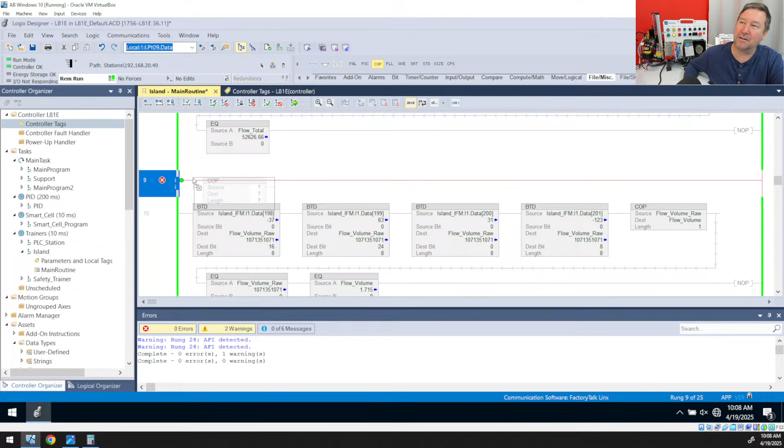Actually, you know, and this is a bad habit of mine. And it wouldn't matter for this, but I'm going to bring this down. I'm going to right click and I'm going to go to instruction help because I should not do this. And just old school, I do.

Notice it says copy file, and then we have synchronous copy file. These are the same thing, except when you use the CPS instruction, nothing can write to the data. Whoops, I don't know why that's popping up. Nothing can write to the data while it's doing the copy instruction.

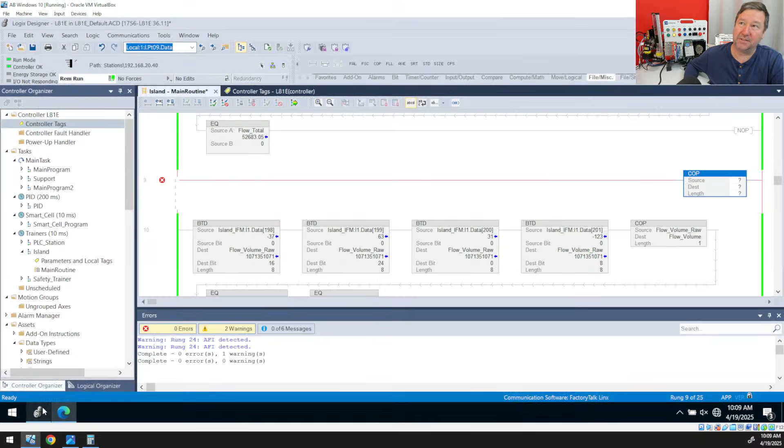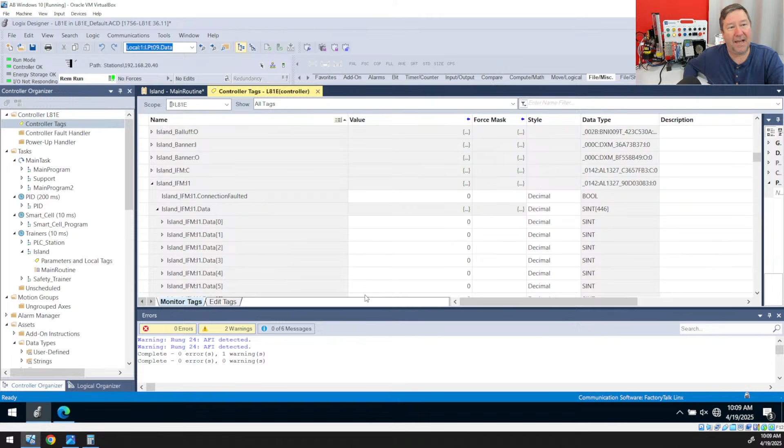So let's go back over to Studio and talk about why that could be important. Because really, you're doing communications if you're doing this, so I need to try to do it the right way here. This is an IO link module. And if we go up, it's actually, how many? 446. So we have an RPI on our data, on our IO modules over here. I'm not going to go in and find it, but every so often, this is going to update this data. And it doesn't matter where it's at. So let's just go back down to that 198.

I'm just thinking about Margie right now, who was in my last class. She's probably sitting there: oh, look at Tim, he's scrolling. I get on people in class all the time. Quit your scrolling. There's better ways.

But okay, here's where we are. So if we were coming down through here and that RPI hit right while it's doing this copy of 199 and 200, it'll stop doing the copy and it's going to update this data. And that means that the first two numbers are going to be your old data and your second two are going to be your new data. And honestly, I don't know there's ever a time that you shouldn't just use a CPS instruction. Now, a very bad habit of mine is I almost always use a copy because the CPS didn't used to exist. Does anybody know of a reason you would ever not want to use a CPS instruction? I can't think of it, but all right.

So now we know we need to get this data right here. This 198 is the beginning of the data, and we want to get it into some singular destination. Now I'm just going to call this my copy combine. And I'm not going to create this yet because that's the important part to understand. Now I'm going to right click the CPS instruction, go back to instruction help, and go down to this length. The length is the thing we have to understand. The length says the number of destination elements to copy. The key word being destination.

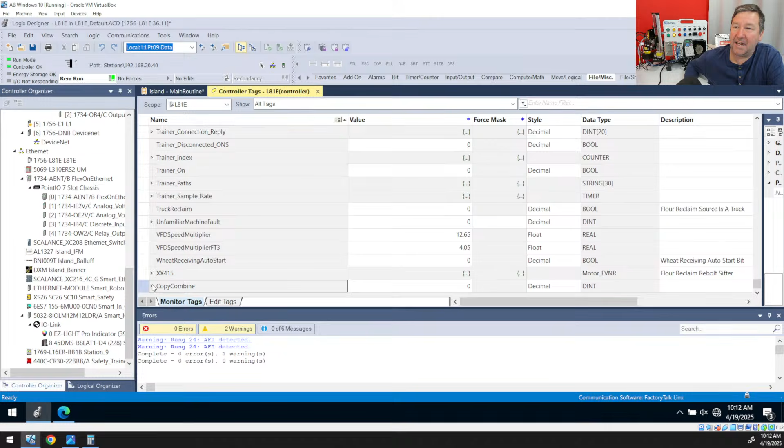Now, what they don't 100% nail down here is this really is binarily how many ones and zeros do you want me to copy? So we know our data is in 198, 199, 200, 201, and we know each one of these is 8 bits. That means that we need a 32-bit number. A 32-bit number is the default data type of the ControlLogix. So if I right-click in New, Copy Combine, notice it defaults to a DINT. So I'm going to hit Create on that. Then I'm going to right-click Copy Combine and monitor it, and hit the arrow by it. And we see in there, we have 32 bits. So we've made one number 32 bits long. So I'm going to put a length of 1, and then we are going to finalize that.

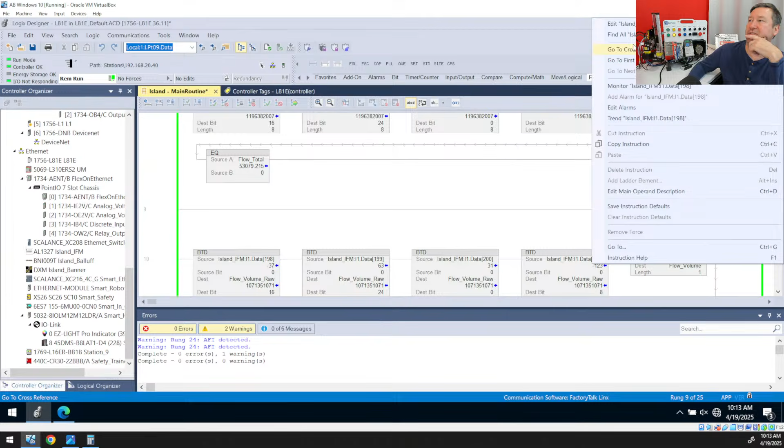Okay, so now we have a destination of copy combine. In fact, I should make this where we could, yeah, this is a good exercise. Should I do this now? No, we're not going to. We're just going to go look at copy combine. And mainly we see we have ones and zeros, and definitely 0 through 7, which would be 198. And then 199, which is 8 through 15, definitely has stuff. And then 16 through 23 definitely has stuff. And then on to 31. Okay, so that gets us to here.

Now here's where it starts to get tricky. Originally this was a floating point number. We're actually going to add a second copy to this. And I've really got to get a better habit. We need the CPS instruction. And I'm going to take that copy combine, and I'm going to make that copy combine real. And I'm going to also make it a length of 1.

Now I want to be able to see this data right here just so you can see what's going on. So next I'm going to go to the Compare tab and bring down an EQ instruction. Also, if you were before version 36, this was an EQU instruction. And I want to put both of those so we can see both of them. So I have copy combine. I'm going to say that it's equal to 0.

And then I'm going to take my copy combine real and that it's equal to 0. And then, oops, I forgot to create copy combine real. So we're going to right click new, and I want this to be a real number. Okay, now you notice we have a red X here.

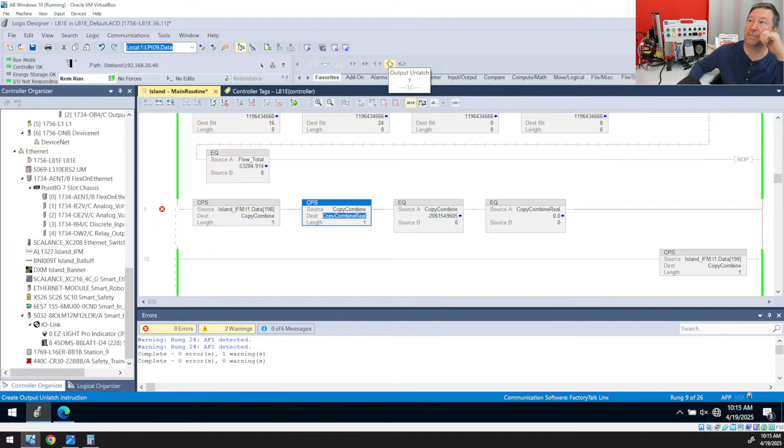So here's something you can do, and I can drag any old instruction down. When I say, and it's funny, I'll tell people in class, just drag any instruction down, and they'll be like, well, which one is that? I'm like, anything. We drag anything down, we highlight the shape, and we type NOP. That's a no operation. That's going to give us green. It's not going to actually do anything. So we'll go ahead and finalize that.

And we are going to get some incredibly insane number. This is -7 to the -36. Now, I don't really get into a lot of math on this channel, but pretty much this means we need to shift this decimal and negative, so the number gets smaller, this direction 36 times. So we have an incredibly small number here. And we know, if we can get to the right place, we know our initial number was 102. We're nowhere close to 102.

Now, most of you got to around here, and it's funny, even in my class, you'll get to about here. And most of them are like, well, go ahead and just use that swap byte and start throwing stuff at it. And so in class, they'll be like, yeah, we need a swap byte instruction. I'm like, oh, what's a swap byte instruction do? It's like, it'll fix your number. I'm like, what do you mean fix your number? Has it got a flat tire? I mean, what is it fixing about the number?

And so it's funny, most of us have heard of the swap byte. We know the swap byte, but we don't know what's going on. So I'm not going to give the full lesson that we do in class because we don't have enough time. But what I always say is most of your data coming across the network is in bytes. It is 8 bits. So even when we go back to our original number, right click here, we monitor it. These are short integers or 8 bits. This really is how the data goes.

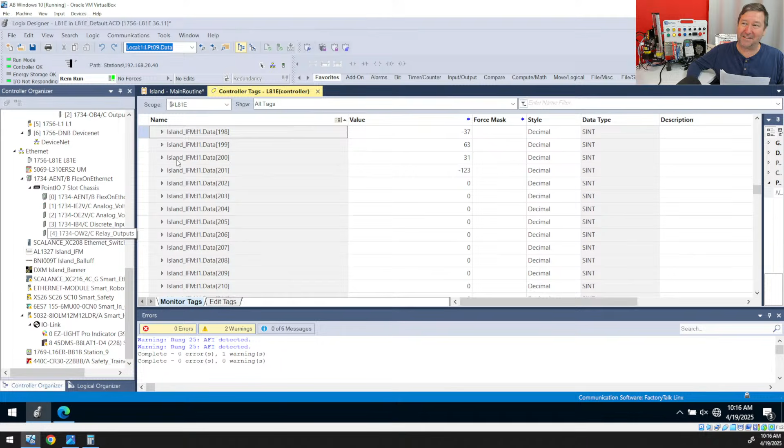Now, I know this is not a perfect analogy, but I always say, some people can pick up a lot of paper. Some people can only pick up a little bit of paper. Now, notice we have A, we have B, we have C, and we have D. So this represents 198, 199, 200, and 201 of our data. Now, here's the trick to this: rarely somebody will pick up all 4 of them and set them so they're in the right order. Now, a lot of things divvy things out one at a time. So there is 198, 199, 200, 201. And when I pick them back up, my data is now reversed.

Now, some systems, they can pick up a little more. No, I know it's paper. It's just an analogy I use. Some of them are going to do 16-bit. They're going to pick up 198 and 199. They're going to set them over here. Then 200 and 201, they're going to set them over here. And that's going to get us to CD AB. So our data is definitely garbage.

And finally, there's one other one. And what I always just say is, some people, when they're picking it up, they pick up 2 of them, but then when they place them down, they place them this way. And then they pick up the next 2. They place them down, they place them this way. And whoops, sorry, I did a little bit off. Let me do that again because, yeah, that was terrible. So instead of being A, B, C, D, they swap them. It's a lot easier when I have a lot of people in there because we actually hand these papers around and we talk about it.

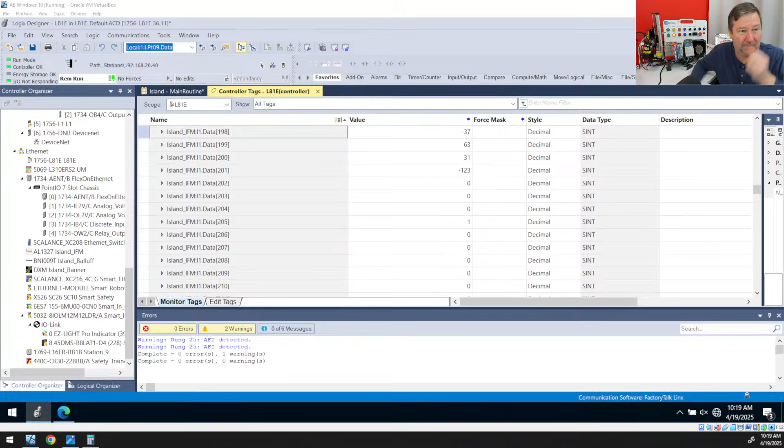But when they set them down, they end up with BA, and then CD. All right. So instead of us just arbitrarily throwing stuff, I want us to understand how is this swap byte doing? What is it actually doing? So we're going to go in here back to our routine, and in fact, we'll just add another new rung because in the end, we'll tidy all this up.

And we are going to go to the Move Logical tab, and we're going to bring down an SWPB swap byte instruction. We're not even going to worry about any of these tags that we already found. I'm going to make a tag called swap source. And I'm going to make a tag called swap destination. And then I do want these to be double integers. So we're going to create this one as a double integer. We're going to create this one as a double integer.

And then we have an order mode, and this is what it's all about. Now, let's talk a little bit about the order mode with 16-bit numbers. Let's right click and go to instruction help, because the order mode with 16-bit numbers kind of makes it a little mysterious about the swap byte. But if we go down to this order mode, notice if it's a 16-bit or an integer, all the options do the exact same thing. They're going to take the first 8 bits and put them in the second 8 bits and the second 8 bits and put them at the first 8 bits.

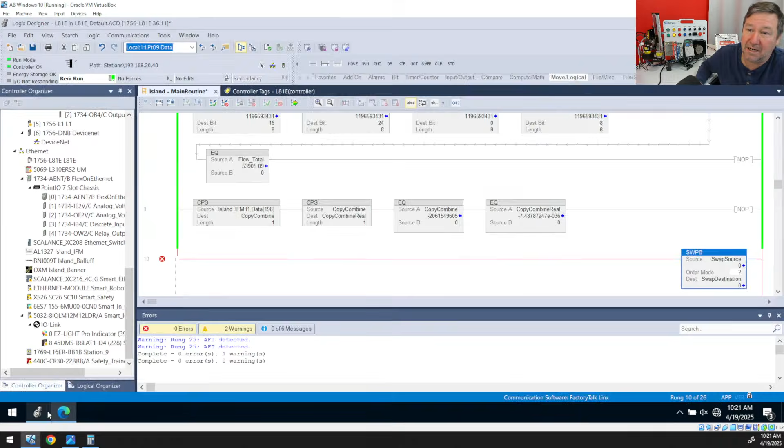But we have all 3 of these options. So people, when they're running this as an integer and they're changing these, it kind of confuses them because they're like, well, it seems to do the same thing. Well, you're 100% right. It does the same thing. But since we have a double integer, that means that they actually do different things. And so for the first one, I'm going to make the order mode a reverse. And we're going to finalize that.

Okay, now what we need to do is we need to put a value in here where we can actually see things change. Now, with a decimal number, this is very difficult because the difference between 32,767 and 32,768 is a significant change binarily. But if we go here and we go to edit swap source properties, at the bottom we can change our style. And this just changes the view that we're seeing here. And I'm going to change this to a hex view.

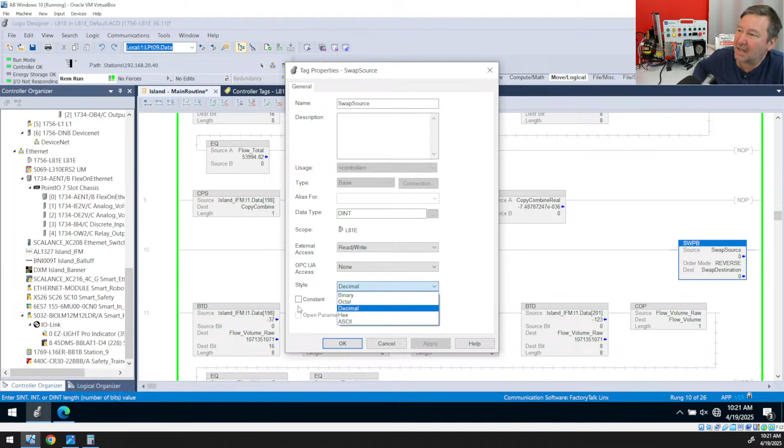Okay, really quick note for all my instructors out there: nowhere in this sentence do I see it say that you need to do a hexadecimal lesson before we do all this. In fact, please just leave that hexadecimal till near the end of the year. That way people quit messaging me saying they're going to drop their class because they can't understand numbering systems. It's really not that important for programming until way later, like right now where we're doing some intense communications.

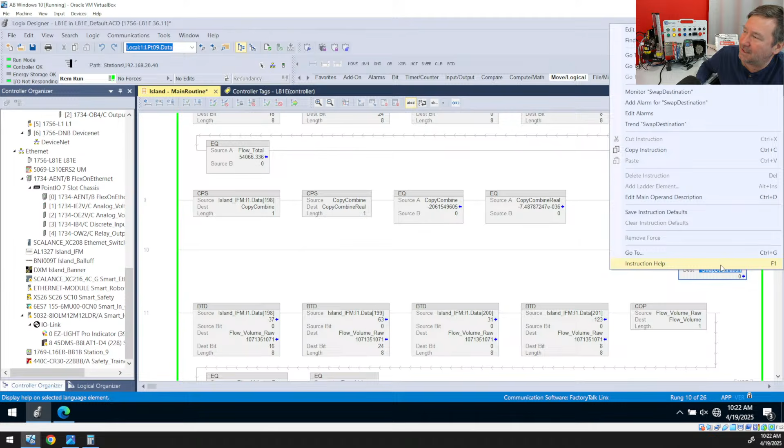But okay, we made this one a hex. And that kind of gets us where it's into a shorter bit. And then we're going to do the same thing on the swap destination here. We're going to change its style to a hex. And then in this one's source, I'm going to make this DDCCBBAA. And we have a reverse order mode. Well, that takes these first 2 letters and puts them there, takes these second 2 letters and puts them there, takes your third, puts them there, and your fourth and puts them there. Or it reverses them on a byte level.

All right, now let's do a rung edit there. And instead of a reverse, we're going to do the word. Now, a word is 16 bits, which in this case is 4 of these letters. And so now we're going to have AABB. Well, the second part of it now is AABB. And then we got DDCC. Well, that's going to kick over here to DDCC. So we've got to figure this piece right here out when we're working through this.

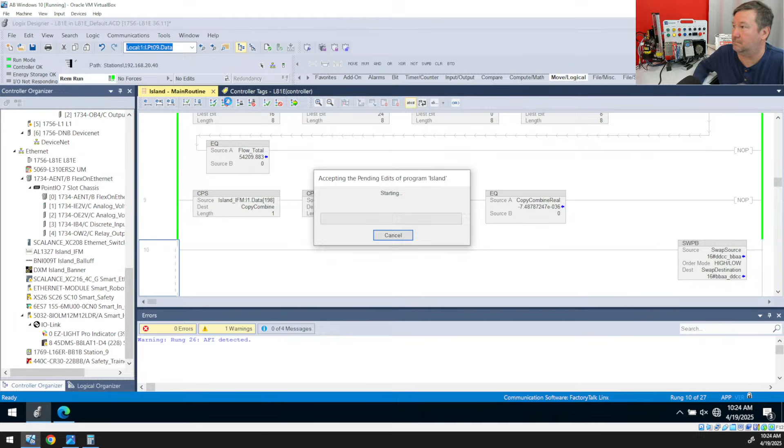But there's just one more. Let's go ahead and do the last one here. And so this is a high-low. And so this keeps us on our 16-bit numbers. We're going to be, instead of AABB, we're going to be BBAA. And instead of CCDD, we're going to be DDCC. So those 3 swaps right there will probably get you to anything you need.

But okay, now let's talk about how we figure this out. And yes, Tony Leroy and a few of you others, why that last step was such a stumbling block. All right, we're going to go ahead and start a rung on it now. Actually, no, I'll leave this one just in case somebody comes up with a question. I'm going to leave that one. I'm going to add another new rung.

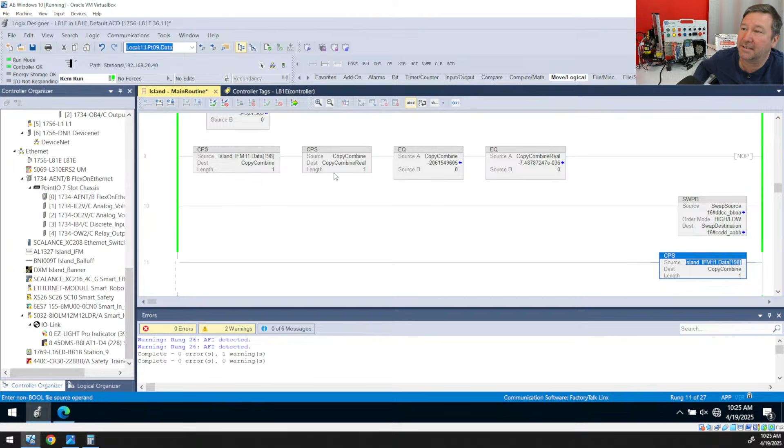And we're going to take, actually, arguably we already have it right here. We have copy combine. No, let's do it all again. Yeah. So no, one thing, we do need this again. We're going to do this again. We're going to do a synchronous. Actually, we do already have it. Yeah, there's no need. We can modify this one now. So I'm going to modify that first one we did. Really, we had a copy combine, and then we were copying to a real. All right, I'm going to delete out that second one for now. It'll be right back in a second.

So we've combined those, and now we've got to figure out, okay, well, which one of these do we actually need here? And so what I'm going to do is bring down that swap byte instruction. And then actually I'm going to bring a branch down around it. And then we're going to right click that bottom left corner of the branch, and we're going to add a branch level. And now we're just going to copy that. We're going to paste it there. We're going to paste it there. We're going to do all three of them. That way we can compare and contrast and figure out what's going on here.

So our source in all of them is going to be this copy combine. And then we're going to hit our order mode. So our order mode on the first one is reverse. Our order mode on the second one is word. Our order mode on the third one is high-low. And then for our destination on this one, this is going to be our combine reverse. And we'll create it as a double integer. The next one is going to be our combine word. We'll create it as a double integer. And then this one is going to be our combine high-low. And we'll create it as a double integer.

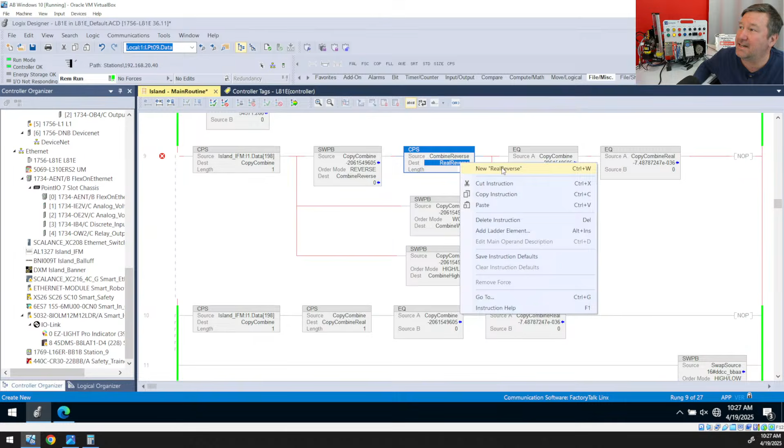Okay, since we have three different ones, now we need three different copies to put this in. So I'm going to go to File Miscellaneous, and we're going to bring down the CPS instruction. And I'm going to put this as our, these words are getting really long, we're going to make it our real reverse. Oops, I even typed that in the wrong spot. That's our destination. Our source on this will be combine reverse. Now, very slowly on this one, because you've got to make sure you get this data type right. This one is going to be our real number, because ultimately, we have a real number on ours. And our length will be 1.

Okay, so now that's almost what I need. So I'm going to copy that there. I'm going to copy that there. This is going to be a combine word. This is going to be a combine high-low. This is going to be a real word. It's going to be a real high-low. And we'll right-click these, and we are going to make them real numbers.

Okay, and then we're going to need these equals that we had here. In fact, we're going to delete these now, just so we can see what we have. So I'm going to put real reverse here, and drop that there, drop that there. It'll be real word. This will be real high-low. Oh no, I missed one of them. Oops, no, I just put the wrong data there. They're supposed to be real high-low, and I put combine high-low. Get that to the right one.

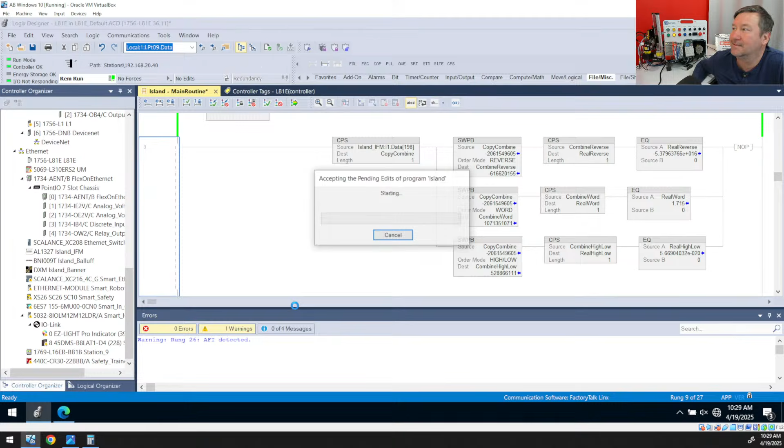Now, Tony and Ian, this is where you got to, and all of a sudden you're like, I can't quite figure it out. And here's where there was a slight hint, which I kind of bounced back and forth on whether to put in here. On the last quiz, somebody's like, you don't give enough hints for us to figure this out. And I'm like, well, I've never really been working on a machine, not been able to figure it out, and walked up to management and said, hey, could you give me a hint on how to do this? Well, now part of this is for us to think through problems. But yeah, I did actually drop a hint in here, and nobody quite nailed it down, which is kind of comical. I thought my hint was really good, but let me get to my hint.

So when I put this quiz out, I put, due to some wisecracks in my last PLC quiz, I'm going to stay quiet on this one until somebody gives the correct answer. And wisecracks is spelled strangely. And that was your hint: SEC stands for seconds.

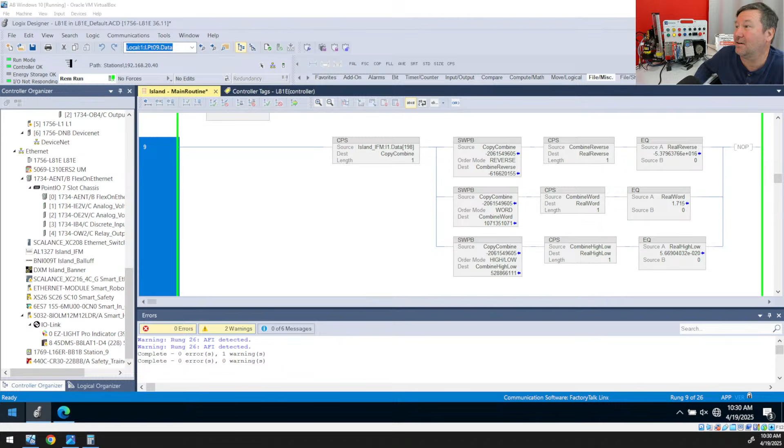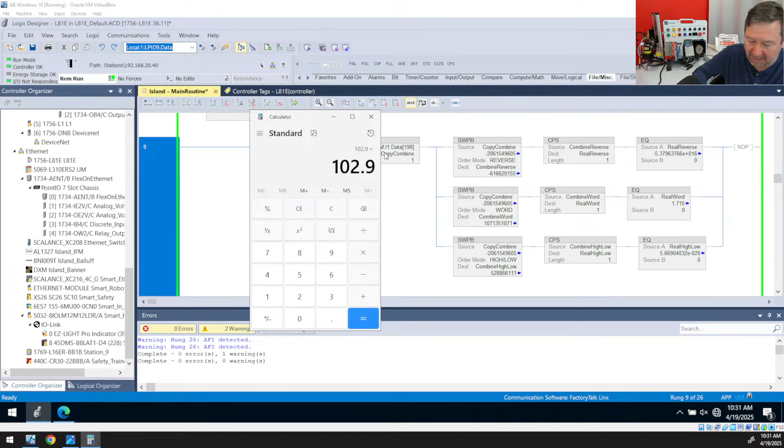And while on the display of this flow meter it is saying 102.9, it actually is running the data across in liters per second. And here's a perfect example. I actually did not find that documented anywhere out there. But if we take our number, we switch back to our standard calculator, 102.9, and we divide it by 60, we get 1.715. And there's your 1.715.

So now I know it's reporting this in seconds. This is my correct number. And so I need to multiply that number by 60 to get minutes. So I'm going to go to my math tab. I'm going to bring an MUL instruction down. And we're going to take that real word and multiply it by 60. And this will be our real word minute. And similarly, this will still be a real number. So real. And we'll finalize that.

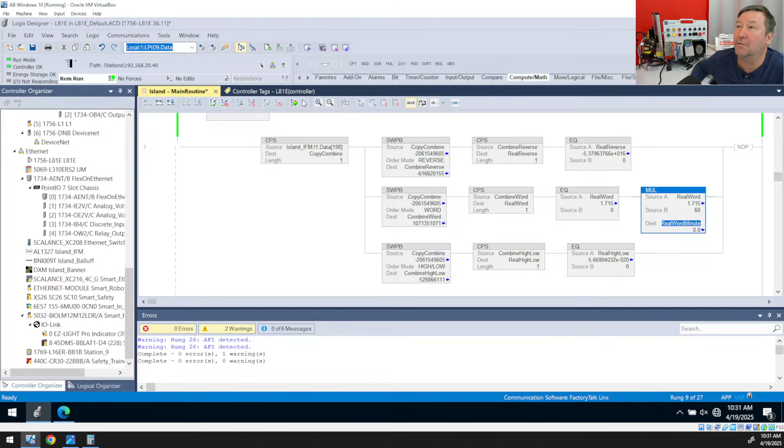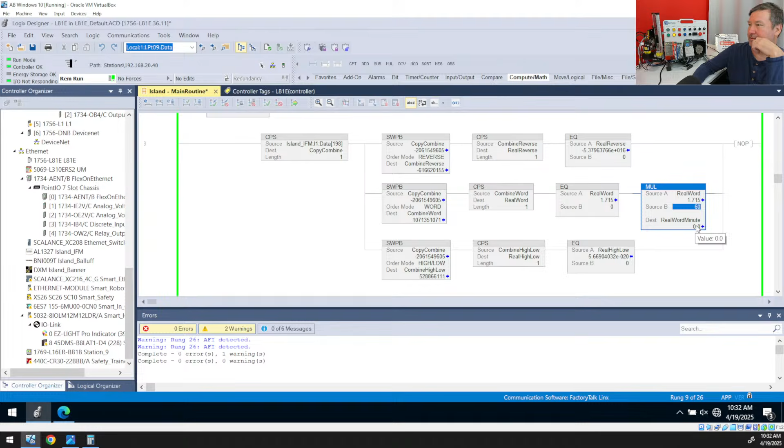What? What did I do wrong there? Real word. Huh. All right, somebody in the chat's going to have to help me out now. What did I do wrong? Real word times 60. Why is that not working?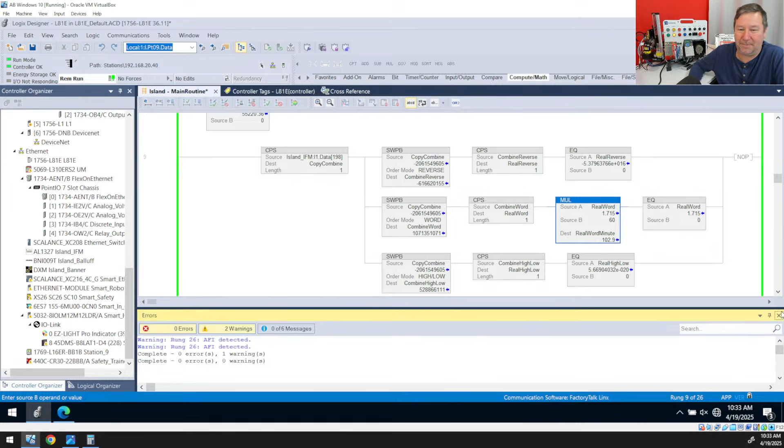So through all that, that should give you enough as far as figuring out where the rest of your 80,000 pounds is, Jeff. And really, this is kind of key. Now, I do want to show one more thing, because the swap is kind of cool. It does a lot of things for you, but if nobody knows what a swap is, and if you're like everybody that comes to my class, this is what you do. You try the reverse, you try the word, you try the high-low. When it doesn't work, you're just like, I think your data's scrambled. What is it actually doing?

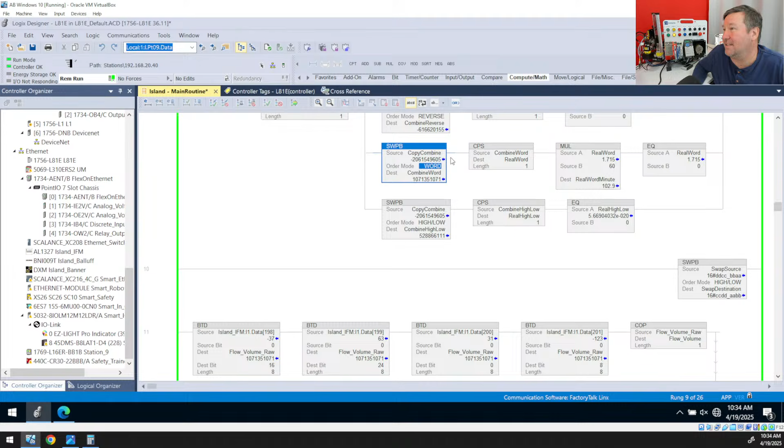So I kind of like the bit distribute method better. Now we're doing the exact same thing. Notice in the end, we had a word swap. Now a word is 16 bits. So that means we're taking bits 0 through 15 and putting them in 16 through 31. And we're taking 16 through 31 and putting them in 0 through 15. Well, the bit distribute does this on a binary level.

So in this case, I'm taking that 198 and I'm taking source bit 0, 8 bits, and I'm putting them in a destination of 16, which is that upper word. And then I'm taking 199, source 0, 8 bits, and putting it in 24. And then 200 is the one that's the small number. So I'm taking its 0, 8 bits, and we're putting it to 0. And we're taking 201 and we're putting it into bit 8.

And for my Connected Components Workbench folks, you're going to be one more step away from this. There is another way, and yeah, Jeff, you asked for it. We'll go ahead and do just one more step here. Here's another way just to kind of nail down what you're going to do in the video that, once the live stream's processed, I'll throw at you.

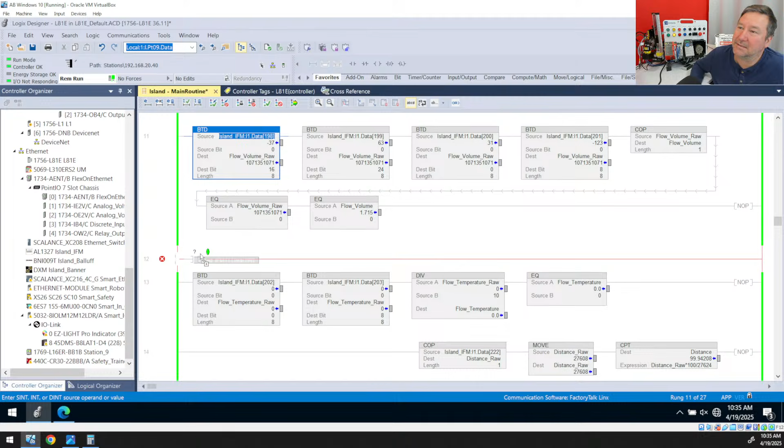What we could have done here is we go to our favorites, and I'm going to go look for a 1 down, and we're going to go to 198.0. Whoops, we got a dot somewhere in there. .0. Oh man, I did something brutally on that. Somehow we're going to get there. Oh, all right, let's just try all that again. I have no idea what I just did. .0. There we go.

And I'm going to put an output energize to binary combine. And I'm going to create this as a double integer. So DINT. Now I know that 0 needs to go into bit 16.

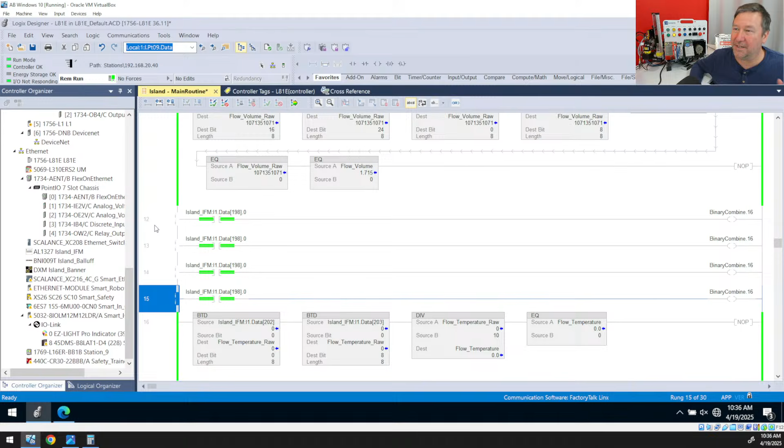So .16. That gets that one. Now I need 8. I'm going to shortcut a little bit. I'm going to give you just a couple of them here just so you can see. Use your imagination a little bit. This will be 1. The next one will be 2, 3, 4, 5, 6.

And then we will get 2. We'll go and put in. There's 6. And there is 7. So there would be more of them in here. And that would be 16. That would be 17. That would be 22. And that would be 23.

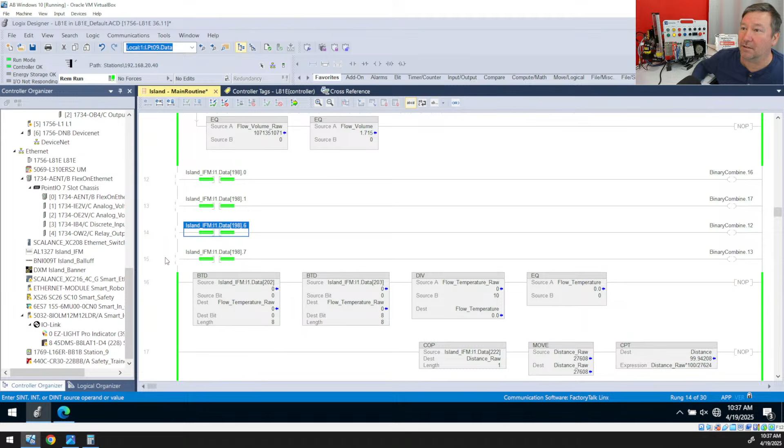And then we would continue to grab, in fact, should I? No, we're just going to copy one of them. And then we would go to 199 bit 0. And we would continue up. That would be 14. And we would, whoops. What did I do over here? I didn't finish.

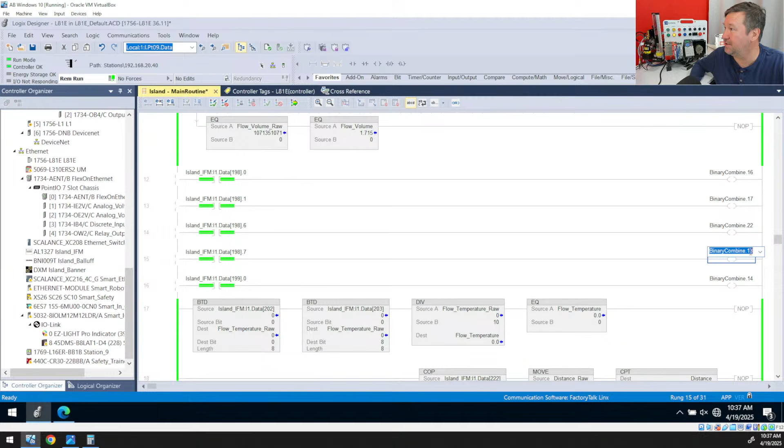Oh, no, that's right. Oh, I just did terrible math. I think I said 22. Yeah, here's what I get for shortcutting. That should have been 22. And that would be 23. And then we continue up. This would be 24. And you would go on through that one. Whoops. Yeah, apparently my typing is not typing this morning.

Okay, then we get to the 200 one. I'm going to copy and paste this. So we'll do all those through there. Then we get to 200. That would go into 0. And you would continue on through 7. So bit 7 here will be bit 7 here.

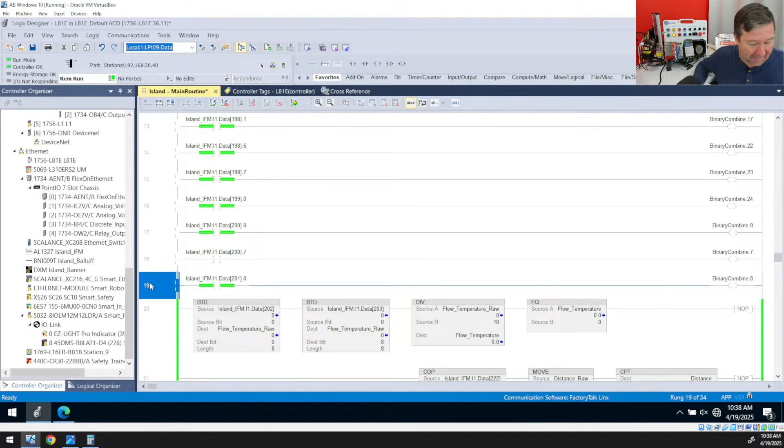And then finally, you would have 201. That would be bit 8. And you would continue that all the way down until you got to 201.7. And that'll be bit 15. And yes, once this, YouTube takes a little bit for it to process, but in a little bit after this processes, I will drop you a video that shows you all that.

Let's see. I didn't actually do the chat today, but yeah, Fellstar, you're right. Yeah, this is all about the single integer. Is it single integer or small integer? I never figure out what to call that.

And yes, Jeff, I'm glad to help you out here. And Daniel, glad to have you here. Jeff Kuiper, as usual, you're always here. Good. In fact, I need to talk to you. I did have some safety questions. So yeah, let's catch up. Maybe we can catch up today or tomorrow.

See, what's the application of this to pass data between PLCs? I would just use a message. Well, no, TA, this is an issue of messages. That's what Jeff was doing here. When you do a message instruction, this can really easily happen.

Let's see, Stone Art, good day. Control connection, thank you for that. Oh, TA, you got it. I see you there.

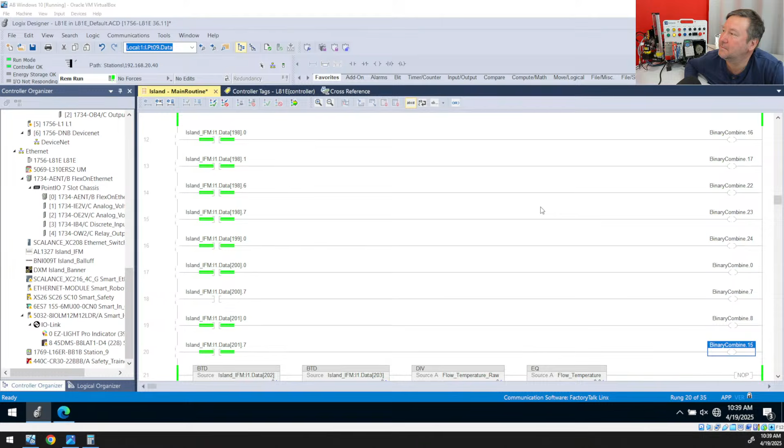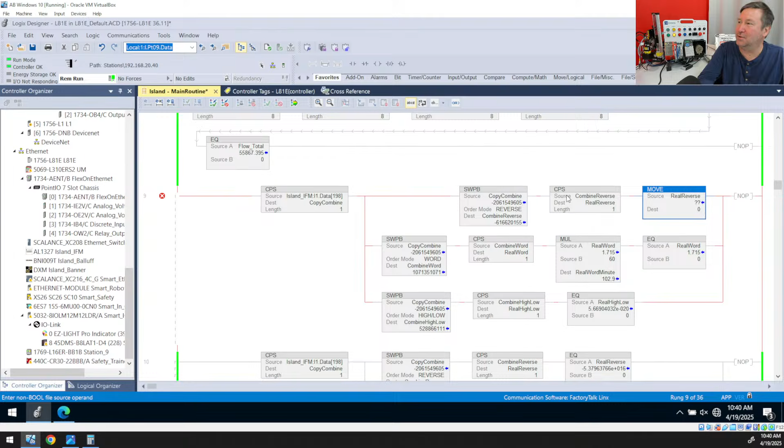Oh, hey, control connection. I don't know why I've never thought of that. Yeah, he is absolutely right. You know what? I always throw in equals here just to make this work. But if you did a move instruction, I don't know. I could bounce back and forth on this. If somebody sees a move, they think it's doing something.

But he's right. If I had, oops, I just messed up there. Undo that. If this had been a move instruction earlier when I had that mistake, that way would have worked. Yeah, you're right.

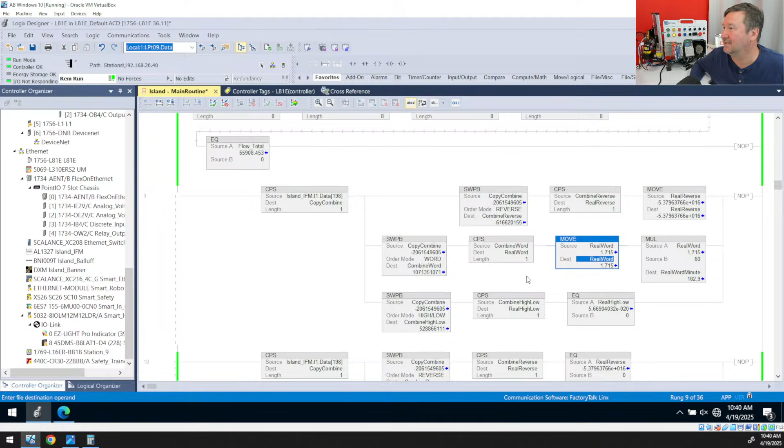But anyway, I've been wanting to make this video because it's always an issue, and it's a growing issue because our networks are growing. In fact, I was planning on doing a more snowballed version of this. I have 3 IO links on what we call the island trainer, and depending on what you plug this flow meter into, it actually does the different swaps.

And so I was going to use that as an example, because a lot of you are like, well, if we know the part numbers of them, then we can look in the documentation. Well, no, I knew this flow meter. I knew I was using this message, but I had this intermediate item that was handling the data in different ways. So being able to identify that data is pretty key.